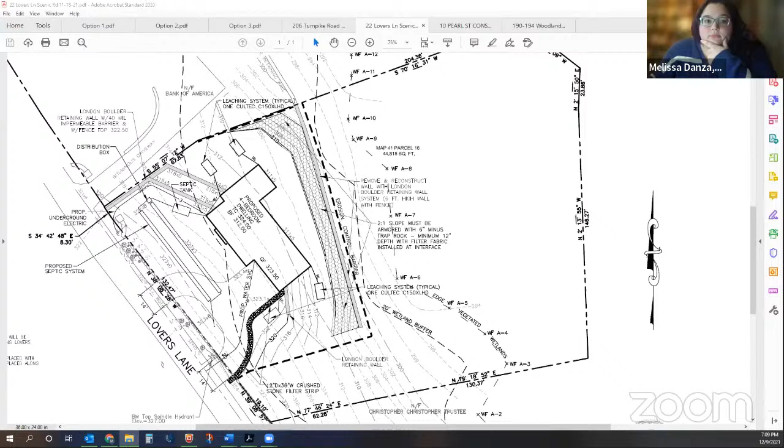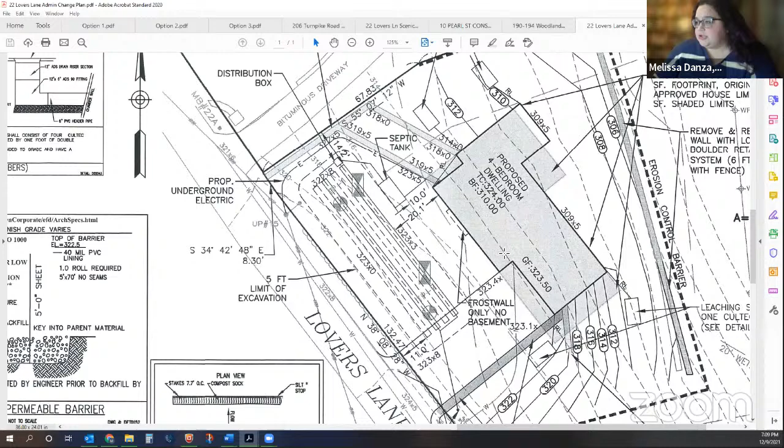Did I understand you right that they're actually still working on it and it isn't finished? The lot had been previously cleared, so no excavation work has started yet. Did this new plan show up? Yes, this is what it looked like before, just graded to the wall. This is further stabilizing that slope in the back.

Melissa, did an engineer suggest the riprap? Is that for stabilization? I think Hamid's on here, maybe. Yep, I'm on, I can speak to that.

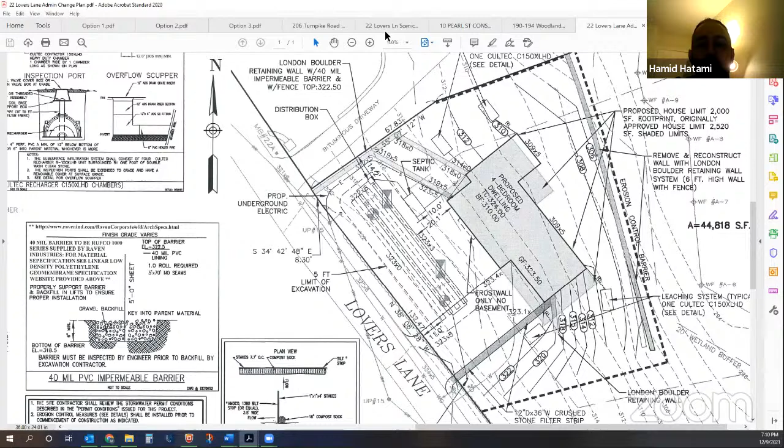On this original plan you see on the screen right now, the basement was 14 feet in height. If you notice, top of concrete says 324 and basement floor says 310. We told the engineer this was from the previously approved plan. We gave them a new building box, the darker black line versus the shaded gray area, and said we'd like it if it was only a 12-foot basement instead. In the new plan Melissa has on the screen, the top of concrete is still 324, but the basement floor is now 312.

In doing so, we have 2 more feet of slope, so that's why you see 310 instead of 308 and 306 only. We said that may be too much slope towards the back to make a usable yard, so riprap will help stabilize that.

Thank you. Yep, and yeah, so it was done by an engineer.

Anybody else have questions about the driveway? I was going to add, for the driveway, we had to go through scenic road and tree removal application. As you can see in the plan, there are 3 trees that would be felled, the 10-inch, the 9-inch, and the 11-inch, where the driveway on the previous plan was. The planning board asked that we basically dance around them, so in this plan that's why you see the driveway the way it is. But we accommodated for that little sliver of additional pavement in the buffer zone with the trench that's already on the previous plan as well.

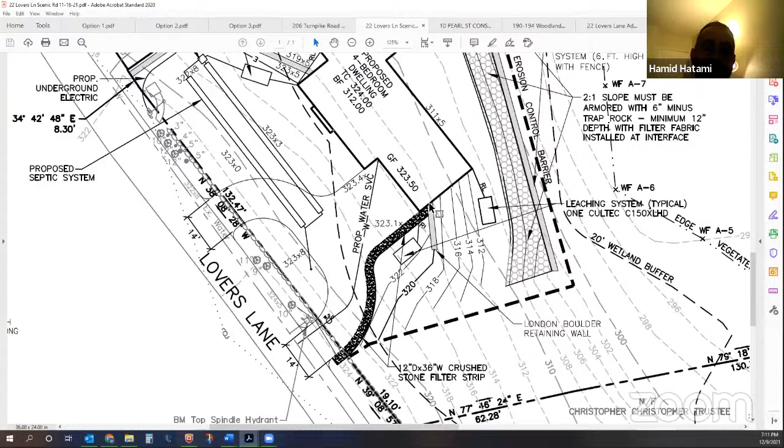Any other board members have any other questions? No. Okay.

So this is an administrative amendment. Do we need a motion here and a vote, Melissa? Yes. Do I hear a motion to approve and have this the plan of record? So moved, as noted. Second?

Second. All those in favor by roll call vote? Watson, yes. Smith, yes. Pete, yes. Geyer, yes. Gregory, yes. Wittes, yes. Osmano, yes. Okay, thank you very much.

We have another request for administrative amendment of 10 Pearl Street, EP 290-1078, fill and level.

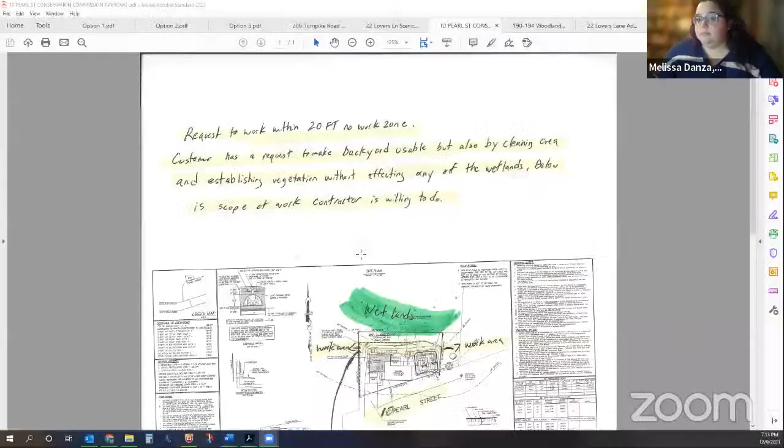Yes, hold on one second. We have Chris Hansen here, who is the contractor, and I will bring up the plan. It should be loading in. No, it's kind of hard to see.

Chris, you there? Yep, how you doing? Do you maybe want to go through an overview of what you're proposing, and I'll have the plan up here? Yeah, can you hear me? Yes, okay, so I got the client here.

We're putting the proposed deck on. I had to do a bunch of grading and drainage work on the side here, as a septic system was graded towards the house - it's a mounded leach field. So towards the back here it's a real low level, and the homeowner in this area here where I highlighted, I know it's just a rough sketch, she's having some ponding issues back here. It's real low, it's muddy, it's unusable. She has a walkway coming around where the proposed garage is, and it's all eroding. She just wanted to see if, since there's some stumps and leaf matter that I showed Melissa last week, she could clear it out, bring in some clean fill, get this area seeded, and be able to use this area inside the stone wall.

Does a 20-foot buffer follow that stone wall and dotted line?

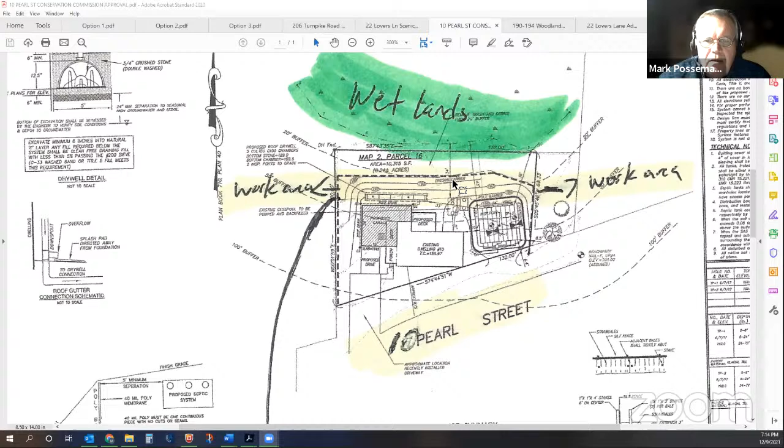So the 20-foot buffer, I believe, right. The stone wall is at the property line, okay, very faint here. And then the 20-foot is pretty much this dash line that follows the past erosion control line. And some of the area is also, I think, Chris, correct me if I'm wrong, but more along closer

to the stone wall as well, kind of more in this area. That's kind of the natural low spot. So what she has is right in this area right here. She's getting a good amount of ponding. Well, when it rains hard, and it's on the inside of the stone wall, and she has a walkway that comes here. It's all eroding.

She'd just like to get this kind of filled and level so she can use it as usable space, not going inside the wetlands, just inside the stone wall here. But it is within the buffer zone. But our plan is to seed it, hydro seed it and everything when it's done. She's just looking to see if she can get more yard space out back here.

So the yellow is the area you're calling the work area. Yep. But if you look at the top left of the diagram over where it says map, you're looking to fill that in a little bit. Is that what you're asking?

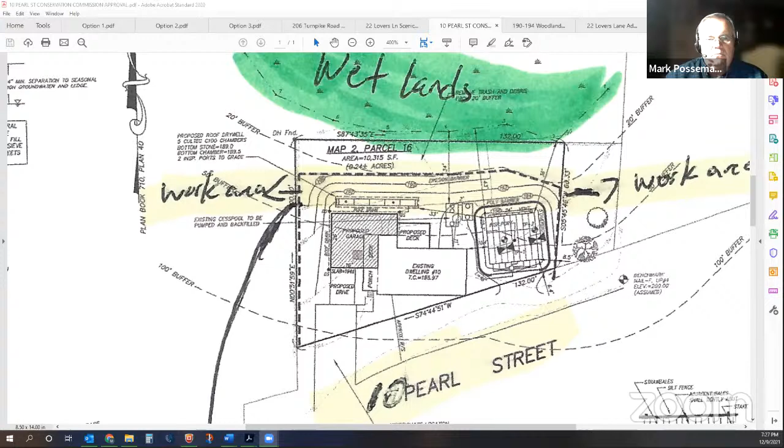Okay, so I guess we continue this. There's really nothing to vote on at this point. Okay, all right, thank you.

Okay, we're going back to our 7:15. Request for determination of applicability, 206 Turnpike Road, map 28, lot 3A. Placement of a sign in accordance with the Wetlands Protection Act, Mass General Laws Chapter 131, Section 40, the Southborough Wetlands Bylaw. The Southborough Conservation Commission will conduct a public hearing on Thursday, December 9, 2021 at 7:15pm via virtual Zoom meeting. The commission will consider a request for determination for a project located at 206 Turnpike Road, map 28, lot 3A, for the applicant Petroleum Processing Solutions, LLC. The project description is placement of a sign.

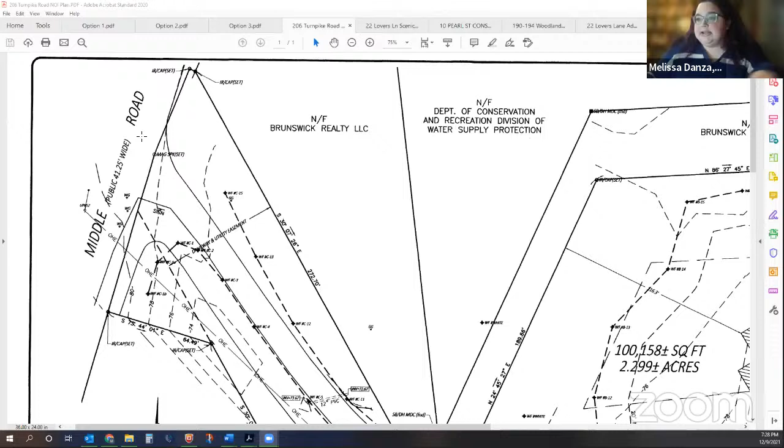Hopefully that Sandy should be loading in. So this is 206 Turnpike Road, off Middle Road. From my understanding, while Sandy's loading in, public safety has requested some sort of sign in order to better locate the property. So this is essentially where the sign will be going. You can tell that on both sides, if you're familiar with it, there is wetlands on either side of the driveway. So we looked at a couple alternatives, and this was really the best format from a viewing standpoint and proximity standpoint that made the best sense in terms of sight line for cars and trucks coming in and out of the driveway, so as not to impede Middle Road.

So now Sandy's loaded in. Is there anything you wanted to add? You're on a roll, Melissa. All right.

So we've talked about this a lot. Sandy sent over today a couple of options in terms of sign look. I don't know if the commission necessarily cares about the final look, but more the disturbance level that it would be. This is the on-the-ground view of what it would look like - this is the driveway, there's wetlands on both sides. You can tell Route 9 is off to the left here, and this is Middle Road. So this kind of tucks it away and allows for distance on both sides.

And I think we've talked about this because it is within the 20-foot buffer, Sandy did request the waiver, and also we're going to scatter a couple native plantings around the sign as the mitigation offset.

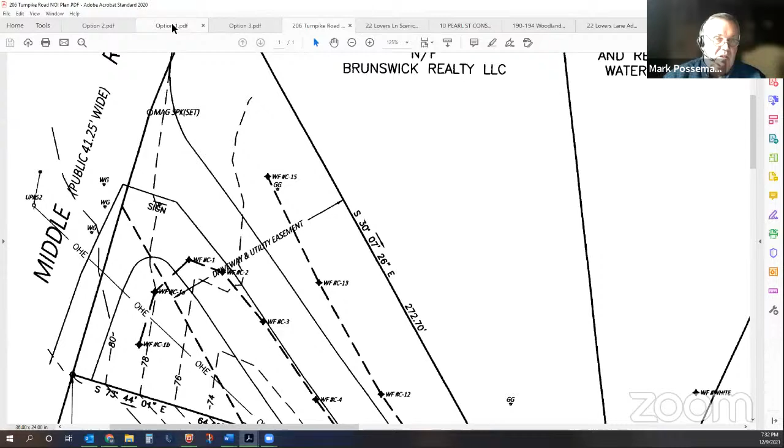This sign right there with the slab looks like it would be more of a disturbance than sign slide 2. And sign slide 3 looks like that would be potentially even more disturbance than all three, or the most.

That's funny, Mark, because I was thinking I read it as they were putting them on Techno posts, and I assumed this was just faux brick, and that would be perfectly fine. It looks good, and it's on Techno posts. It's fast, easy, pre-made. Throw it in, get them up.

So Russ, you're basically saying the Technopost would be really minimal disturbance? Yes, wicked minimal. It's a small machine that augers them into the ground, a self-contained apparatus, and it's a good deal. Look it up online, it's worth a look.

All right, so these signs we're looking at really are not on Technopost. These are just examples of where we want to place the sign, and some ideas we had about the sign. But the sign itself, when we do the permit, we will pick a sign that we can build on Technopost, because it will cause minimal impact. That was something I had talked to Melissa about.

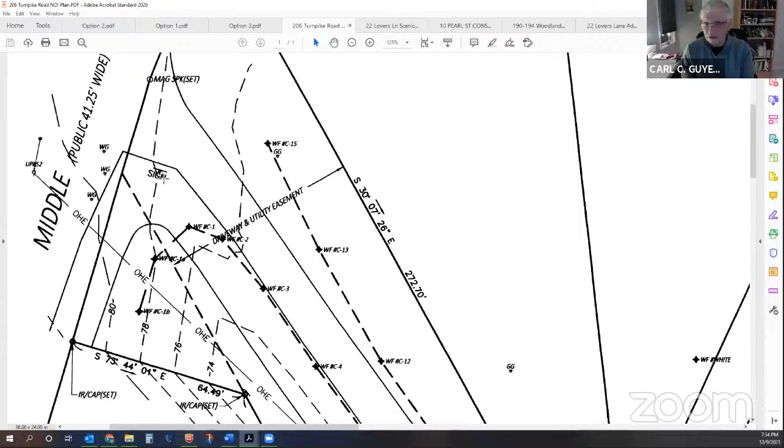So is all that lawn actually wetland? Part of it, not all of it, but part of it, yeah. Okay, all right, because just from the photograph, I actually live near there. Yeah, it looks like lawn, so it might be better over there. Okay, all right, thank you.

We really chose that side of the driveway for the most part because of the ability to see traffic better having the sign on the left, for safety. It's easier because of the way it curves toward Route 9. If the sign was between the driveway and Route 9, it seems like you wouldn't be able to see traffic as well. Great, thank you.

Okay, anybody else have any comments? Questions?

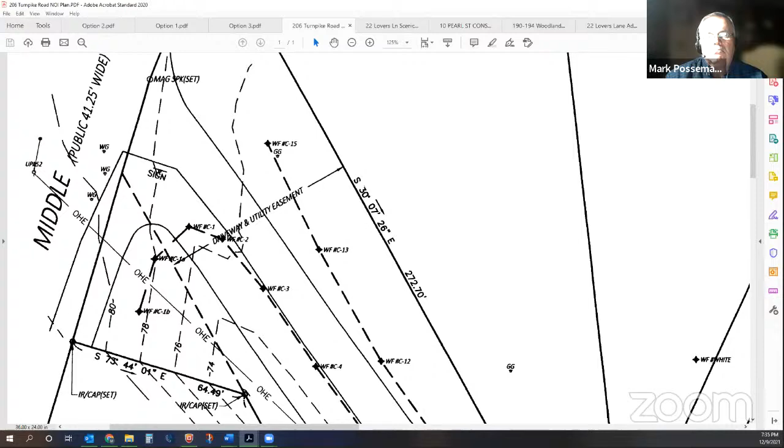Is the board thinking positive or negative determination here? It looks like negative, with some straw wattles in place just in case.

I've seen helical piles going before. When I saw it, it was just a skid steer loader with an apparatus that drives the auger down in, and you get the tiniest little pile of spoils right around the post, that's it. I think they even come quite a ways from there. It's a small little tiny machine now.

So I would be in agreement with you, Ben, provided they're on Techno posts or helical piles. Yep.

Can that be in the negative determination that it has to be on piles? It can be a condition.

We approved the same thing up the street on Middle Road, on a porch or something that was added on. They did the same thing, next to the wetland. That's right.

Okay, do I hear a motion for a negative determination with the provision that they're on techno-post or helical installations, whatever the technical terms are that I'm not familiar with. I'll leave that up to the experts. So moved. Second. We have a second.

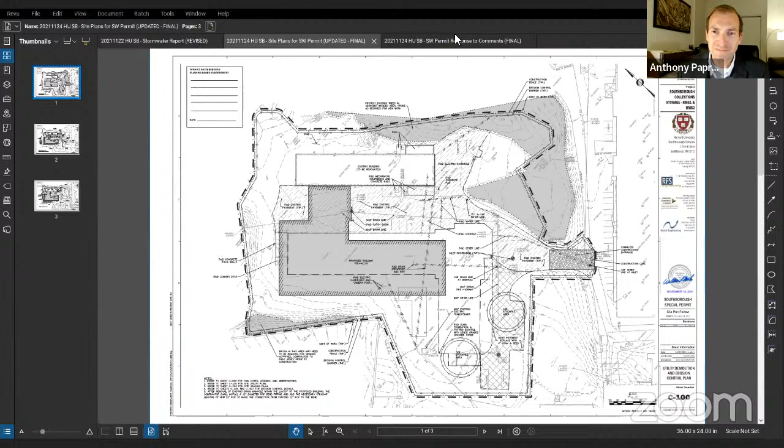Mark, you still with us? Yeah, okay. I was not at last meeting, so I was looking for others to jump in. Oh, okay, I thought it was a moment of silence. You looked very still, I got a little nervous.

I missed last meeting when this was presented, so I'm a little out of pocket on this one. It does sound like the concerns that we raised have all been addressed, and Fuss O'Neill is now on board completely with the drainage design.

So does anybody have any additional concerns, or do we think we have everything that was noted as concerns wrapped up at this point? I think we're all set. Okay, then.

With that, I would say that we can go ahead and close the hearing. Oh wait, Mark, do you want to ask for public comment first? Sorry, sure. Only because you have to.

Anybody from the public who wishes to jump in on this public hearing, just raise your hand and Melissa will let you in the meeting. I'm not seeing any hands. Okay, no hands, then we'll go back to looking for a motion to close the hearing.

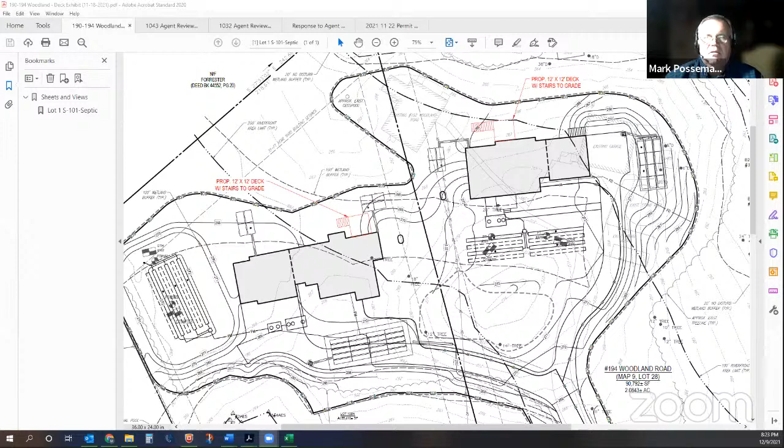Does anybody have any issues with this? Do they actually specify helical piles, or how is it that it's being assumed that these are going to be normal poured footings? Like sonotubes? Yeah, I would assume so. We're even doing a lot of the precast Bigfoot type sonotube footings now.

So it's not even a pour-on-site item, just excavate and set. So it's already within the limit of work. They started demoing, they have not started construction yet. So they wanted to make sure that this updated plan was approved by the commission before they started.

How are they doing with you now, Melissa? They're doing great. No, they are. They got their restoration planting plan in that was required.

And I reminded them this is also a site that they have to submit the vernal pool certification by, I think, June. We gave them a year, so that gives them the time this March and spring to get that all together. So they signed their contractor affidavit. I have an updated O&M, I have the planting plan, all as well.

And I saw the demo was done, so they've been good with you that way. Everything's good on site? Yes. Yep.

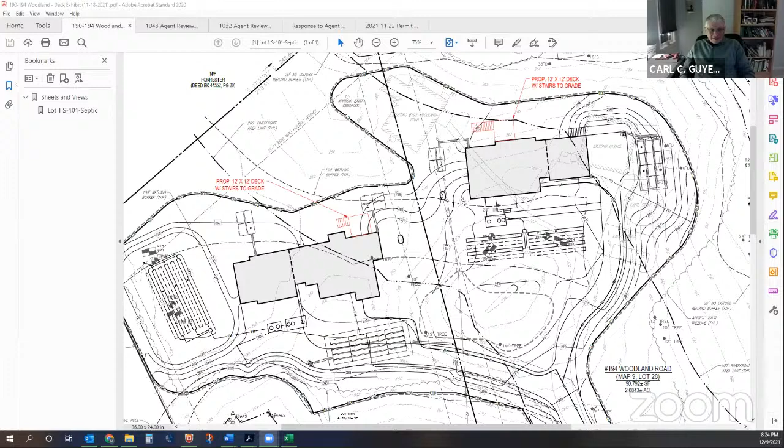Okay, do I hear a motion to approve the administrative amendment? So moved. Second? Second. All those in favor via roll call vote? Watson? Yes. Smith? Yes. Pete? Yes. Guyer? Yes. Gregory? Yes. Wittes? Yes. Possemato? Yes. Okay.

Next we have a request for certificate of compliance, Stonebrook Court, DEP number 290-1028. We are still waiting on revised materials. I believe Joe met, is meeting Danny out there tomorrow, to talk about the invasives that are still prevalent. Maybe Joe, if you could do a quick recap.

Actually, I met with Danny this morning. Reviewed the locations where I had pointed out in the review that there were some invasive vegetation. As I noted in our review, there were no conditions in the order regarding invasive species management, but I had done an open space review on the site, and there was a condition in the planning board permit that any invasive vegetation within the landscaped area or the open space be managed and then approved by the Conservation Commission before issuing a certificate of compliance.

So we did look over those areas along the edge of the limit of work and pointed out some areas of multiflora rose, oriental bittersweet primarily. Their intent, I believe, is to hand remove because no herbicide application is allowed under the order. Hand remove, cut and pull those plants out.